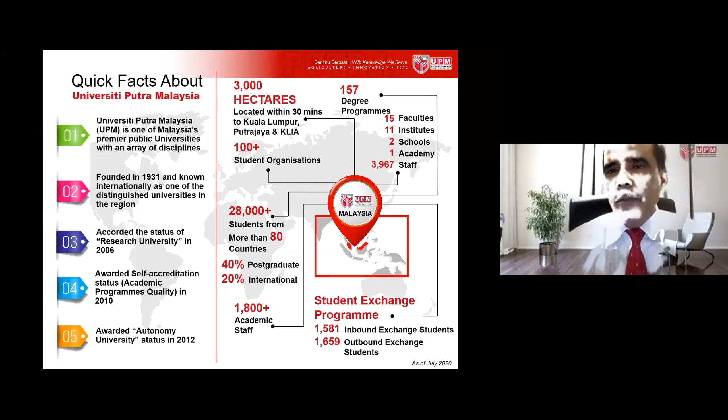UPM is one of the research-based universities in Malaysia. We have 5 research-based universities, and we are more focused on agriculture. We have a long history, and we have faculties and postgraduate students from internationals around 80 countries represented.

We also participate in different international standing rankings, and this is a little bit not updated, as in 2021 our ranking changed a little. We have different faculties, 15 faculties, and 11 institutes.

Within those institutes, there is one Institute of Tropical Forestry and Forest Products, and I'm attached with that laboratory. We also have a school, and our institute also comes under the Higher Education Center of Excellence, HICoE. There are a few institutes given by the ministry, and we have different accreditations for different courses.

We have also collaborated with a few universities worldwide, with MOUs and MOAs with different universities, and international students from 80 countries. We also have a summer school and research clusters, and some commercial products, which I'll show here. This includes some translational research, awards, IP, and community engagement projects with Safe Kids, Air Asia, and Farm Fresh.

So let's come to that. He already gave the introduction about me, so no need to go more into that. These are my research students, but most of them have already passed out - I think 2-3 are left now. Most of them completed their PhD and Master's degrees from here.

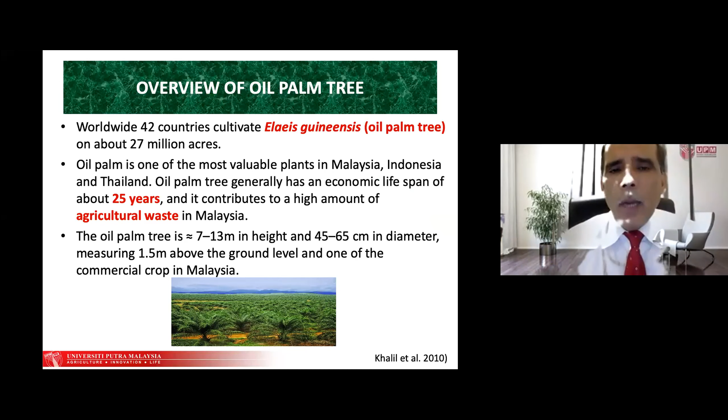I don't need to go more into the oil palm tree itself. If you look at the distribution of oil palm plantations worldwide, there are several countries doing this, and looking at the distribution of oil palm plantations in Malaysia across different states, you can find that out.

When we look into what constitutes the oil palm, there are three things we can use: oil palm frond, empty fruit bunch fiber, and oil palm trunk. Most of the time the empty fruit bunch is more readily available, because the palm oil mill extracts the palm oil and then disposes of it, and it's one of the hazardous materials. So there are many industries now that can clean it up and make fibers, which you can buy and use for different purposes.

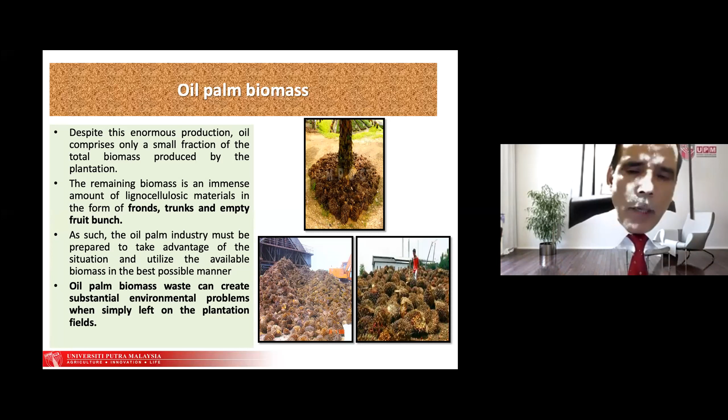If you look at the oil palm situation, there are thousands, even millions of tons coming out, and the remaining biomass is very difficult to handle. This is one problem for the palm oil mill - how they are going to dispose of it. Oil palm biomass can create substantial environmental problems when left on the plantation field.

If you look at the palm oil industry, palm oil is 10% and 90% is biomass. This biomass includes oil palm fibers, oil palm fronds, and oil palm trunk fibers. These are the things that come out as byproducts from this industry.

If you look at oil palm waste, there's mesocarp fiber, palm shells, empty fruit bunch, trunks and fronds. Generation of oil palm waste during processing amounts to millions of tons, like 30 million tons, and this can vary.

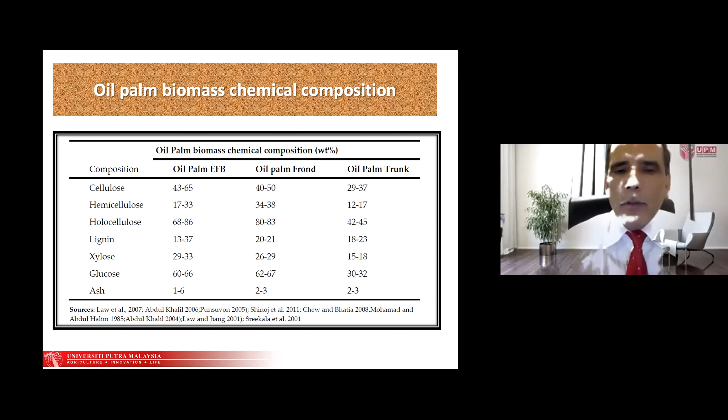When we look into the chemical composition of oil palm biomass, we find a good amount of cellulose, lignin, and other material, which can be suitable for various applications, giving whatever form of strength we want. This can vary from place to place, and the data range reflects that - some people have reported 40 and some reported 50, so we take the range. With that range, oil palm has a good amount of cellulose, which gives strength for construction or other purposes. It also has good lignin content and tough fiber.

Nowadays everybody is talking about nanofillers, and there's been research on oil palm for this. A few researchers, including ourselves previously, have worked on this - this is very old data from when I first did this work. Very few people were working on oil palm nanocellulose when we started in 2014. At that time we produced microcrystalline cellulose and did total chlorine-free pulping using the acid hydrolysis method, then used hydrogen peroxide bleaching sequence for that.

We did FTIR analysis and found that acid hydrolysis does not affect the chemical structure of the cellulosic fragment. We also did morphological analysis, investigating our MCC using scanning electron microscopy, and we also did AFM analysis. All of this is published work that you can find in the literature.

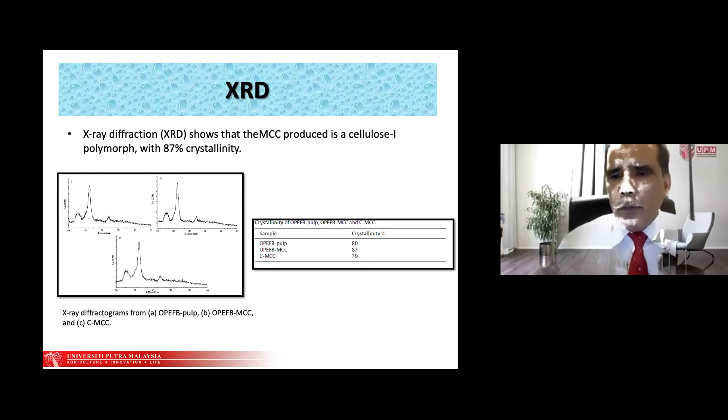And we also done the XRD, and we find out that the MCC have a crystallinity of 87%. And then we also done the thermal properties, and we find the degradation temperatures for the MCC and pulping and residual content, and how the peak temperatures we are getting.

In view of the thermal analysis results, we concluded that MCC samples produced from the oil palm pulp has good thermal stability, and it can be suitable for the production of green composites.

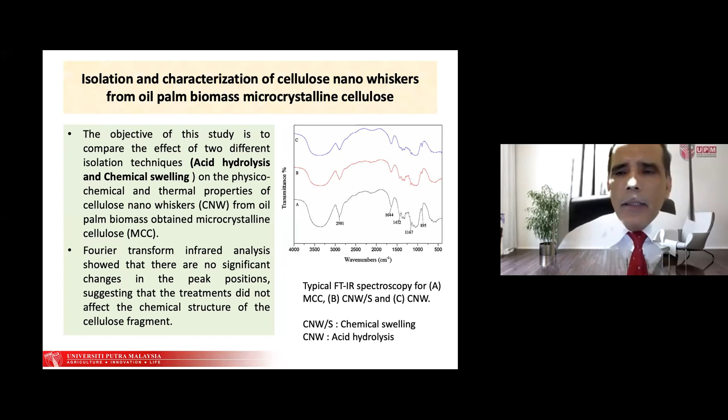We also done the microcrystalline cellulose, and we also done the cellulose nanowhiskers from the MCC, and we analyzed it and compared with the MCC. All these things you can search, it's already published in the Carbohydrate Polymers Journal long ago.

We also analyzed the structural and morphological structure, and we find that the size is within range. We also done the XRD, and we find out the crystallinity of that nanowhiskers is 88%.

We also analyzed the TGA, and we find out that the produced cellulose nanowhiskers exhibited better thermal properties than the MCC, making them suitable as a reinforcing agent in biocomposite preparations.

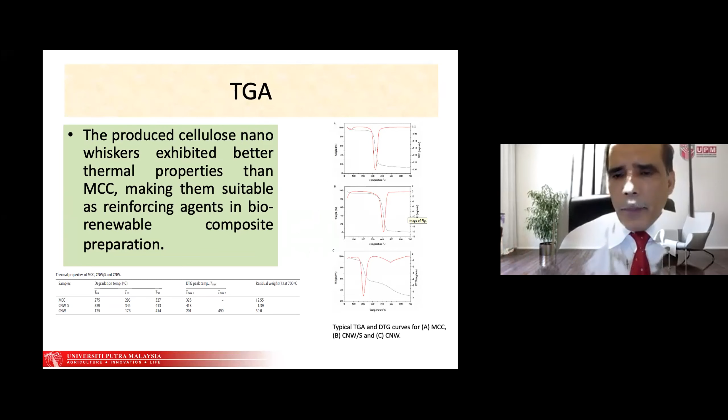We also done another research, we call it the oil palm fire retardant. So we modified the oil palm fillers, made powder from it, and then treated it, and later on made composites from that. So basically that's how we treated it.

First we did the grinding of the oil palm fibers. We done the chemical treatment by bromine water and SnCl2, and cryogenic crushing to make it very fine powder, followed by the high energy ball mill process. The high energy ball mill process proved to be a sophisticated technique for the reduction of macromolecules.

This is a physical method of making the nanomaterials.

We checked the size through the TEM image, and we find out that the lowest size we get is 6 nanometers, but there is a range of sizes after the crushing—it may be 40 nanometers, 60 nanometers. There are different ranges out there.

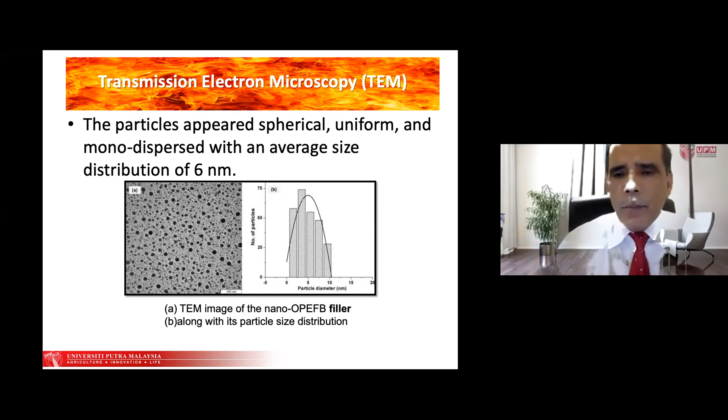So because of that, we plotted the number of particles in that TEM image. We also done the XRD of that nanofiller, and we find out that the decrease in crystallinity indicated that the mechanically operated ball milling induced a significant decrease in particle size from the raw material to the nano oil palm fillers.

We also analyzed the untreated oil palm fiber, brominated, and brominated with tin chloride. From the FTIR spectra analysis, we confirmed that the SB material, which has bromine and tin chloride treatment, contains those elements—SnCl and bromine are absorbed onto the surface of the fibers, while still maintaining the basic structural components of the cellulose, hemicellulose, and lignin. So it did not disturb the structure of the fibers when treating them.

We also looked into the comparisons, on the left side, of before ball mill and after ball mill.

We investigated the EDX, showing the presence of tin, carbon, oxygen, chlorine, and bromine elements, both before and after the ball mill.

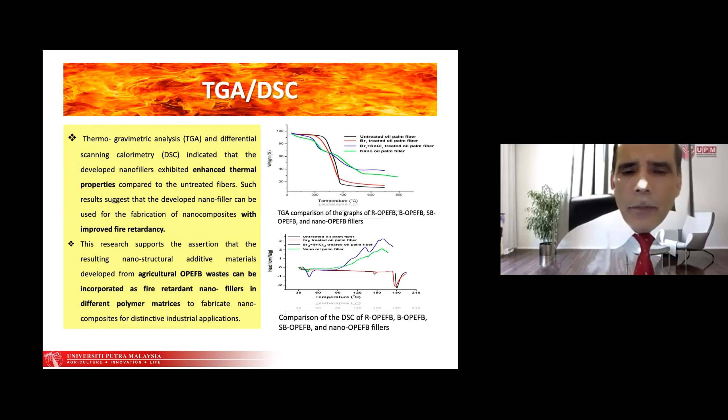We also done the TGA and DSC of these materials, and we find out that the resulting nanofiller can be used for the fabrication of nanocomposites with improved fire retardancy, and this can be incorporated as fire retardant nanofillers in different polymer matrices to fabricate nanocomposites for distinctive industrial applications.

We also earlier done work on oil palm jute fibers, because the oil palm comes from the fruit part and jute is from the bast fiber. So we had a purpose to make a unique composite that can be used for advanced applications.

So we done different layering patterns: the top oil palm on both sides, and the core we put jute fibers, with both outer side layers also put into jute fibers, and we made it into composite forms, and studied its mechanical properties and other properties.

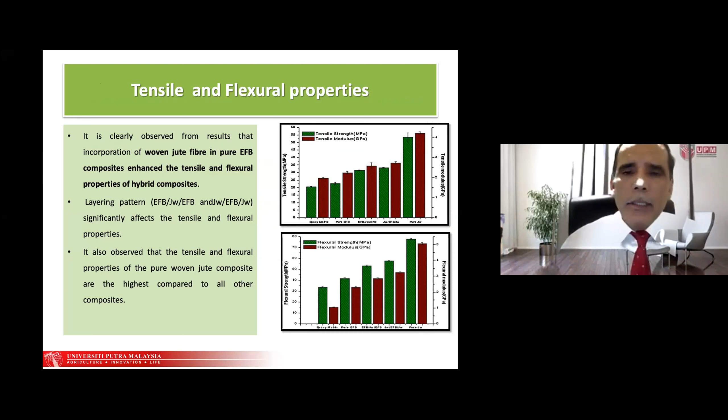We found that the woven fibers in the EFB enhance the tensile and flexural properties of the hybrid composite compared to the pure EFB composites. We also looked into the composite and found that the jute fiber has better interaction bonding with the matrix compared to the EFB alone with epoxy.

We also performed dynamic mechanical analysis of these materials and found that the EFB and jute hybrid composite exhibits the lowest storage modulus, showing that increasing jute fiber loading enhances stress transfer. I want to explain something about this.

DMA is a form of testing where you measure the mechanical properties against temperature. From that you get the storage modulus of the materials, you can get the loss modulus, and you can get the tan delta, which is the damping factor of the material.

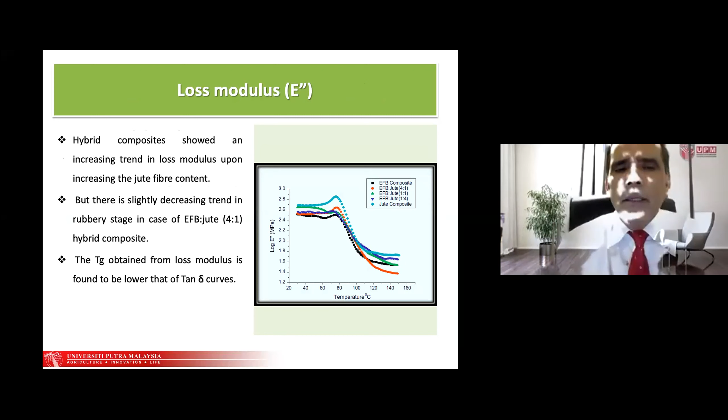We also analyzed the loss modulus and found an increasing trend upon increasing the jute fiber content, because jute fiber has better strength. We found a slight decrease in the rubbery stage, and the Tg obtained from the loss modulus was found to be lower.

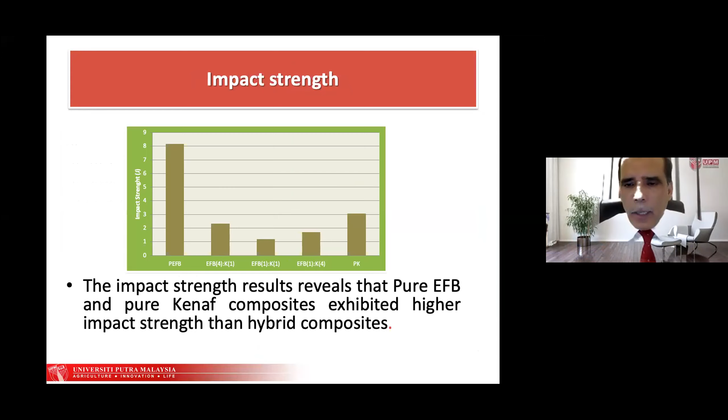There is one research we did on that. In this research, what we did basically was look at the effect of radiation. This is a simple overview. Then we did another research on Kenaf and oil palm, where we looked at the radiation effect.

There was one student working at the Nuclear Malaysia Agency, and she had access to it. So we went through irradiating the samples in gamma cells using different radiation doses.

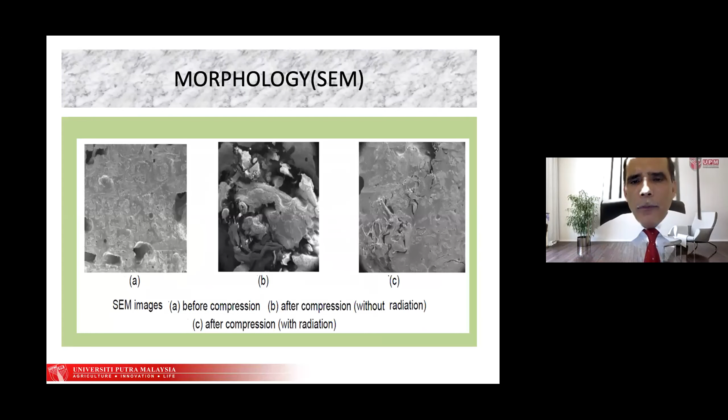We found that the radiation dose improved water absorption, and the interaction between fiber and matrix also improved after irradiating the composite, and compression strength also improved. For example, 50 and 100 doses showed better results compared to non-irradiated and 25.

We are also about to finish a PhD on oil palm and sugar palm, developing an insulation board. Our purpose was to use both waste materials, since sugar palm and oil palm are both waste materials.

We already did the treatment for this. We made different types of insulation board using different fiber ratio compositions, and studied the thermal properties, acoustic properties, and other aspects. We found this to be very suitable material for insulation, and we have already published some work on it.

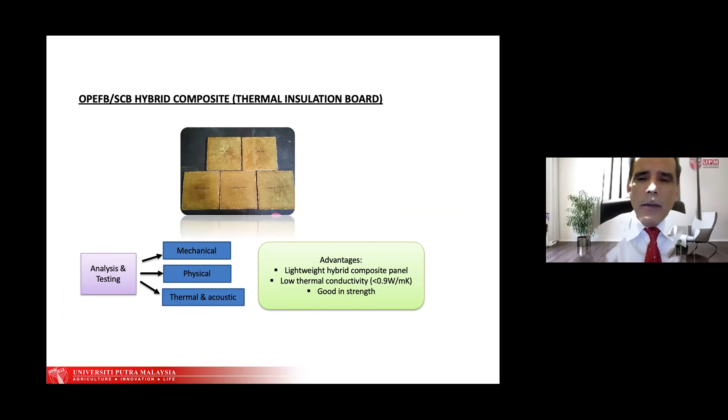You can find this work in construction and building materials journals. We published two papers related to this, and this analysis has largely been the output of this research published in journals.

Looking at the overall scenario, these materials can be used in automotive, aircraft, decoration, furniture, building, and food packaging applications.

I'm just going to briefly cover one recent international project we completed on food packaging. We developed packaging material from oil palm EFB. This project started in 2016 with Malaysia and UK partners, both industrial and academic, and we finished the project in 2019.

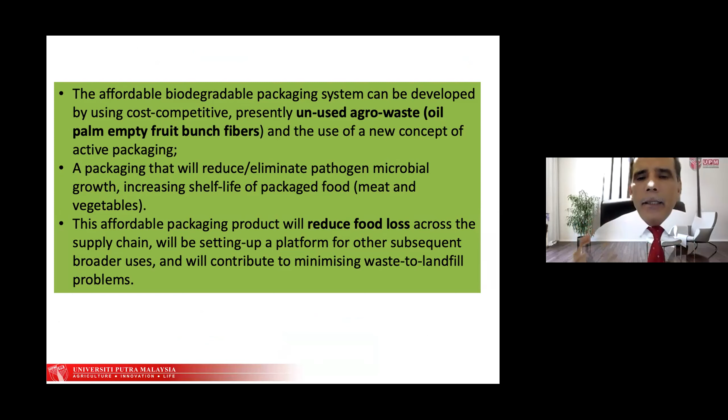So basically in this project, our purpose is to use agro-waste materials and the new concept of active packaging. We have to develop a type of packaging material which can reduce pathogenic microbial growth, increase shelf life of the packaged food, reduce food loss across the supply chain, and contribute to minimizing the waste to landfill problem.

So look at the concept: this is a fiber, then you do the pulping. This is a simple flow for this process. We chose this material because it's cheap and large in quantity, with continuous supply from waste to high value added product, low lignin content, high fiber, and good bonding strength. It can be used as packaging paper bags, fabrication of cartons, food trays, vegetable trays, and it's environmentally friendly, non-toxic, and biodegradable.

This is a pulping plant. You can do the pulp molding by wet type, or you can do the pulp molding by the dry method. So this is the setup of the industry where we did the pulping.

So this is the pulp we developed in our institute, and we took this pulp to the industry and put it into the pulverizer tank. In this pulverizer tank, if you want to add any additives, you can add them at this stage.

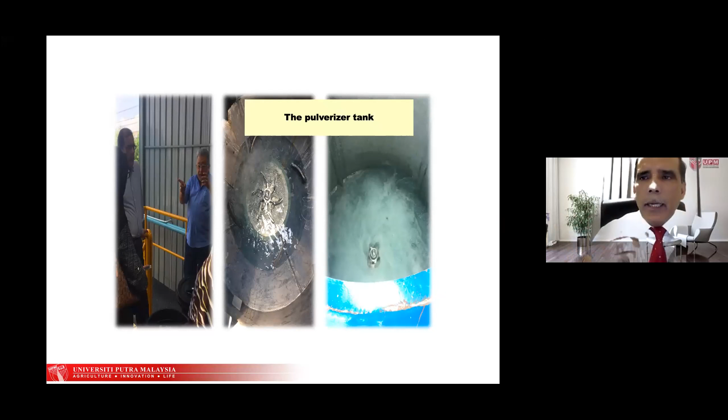After that, putting the pulp here, there are high speed agitations and low speed agitations. Then the pulp slurry was pumped into the holding and mixing tank. After the mixing tank, there is a pulp mold and a control panel.

So you can control everything, you make the settings there, and according to that setting, that type of product is produced based on the mold you feed in. So we produced this lunch box from that, and we looked into it.

There is a positive effect: it's smooth and well formed, and there is a positive charge allowing easy bonding with water and oil repellent agents.

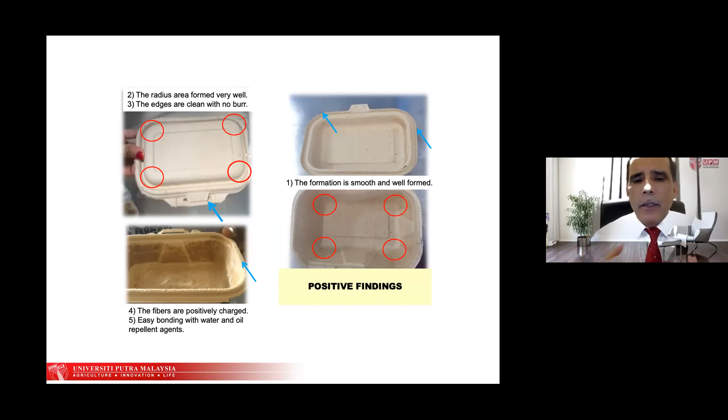And we did the second stage trial over around 3 years. In this trial, we made what we call the plate, because by that time they were already doing that. And parallelly, we were also doing research in the UK.

Initially they also tried to make pulp molding products using oil palm fiber, which we sent from Malaysia to them, but they were unable to produce the right shape.

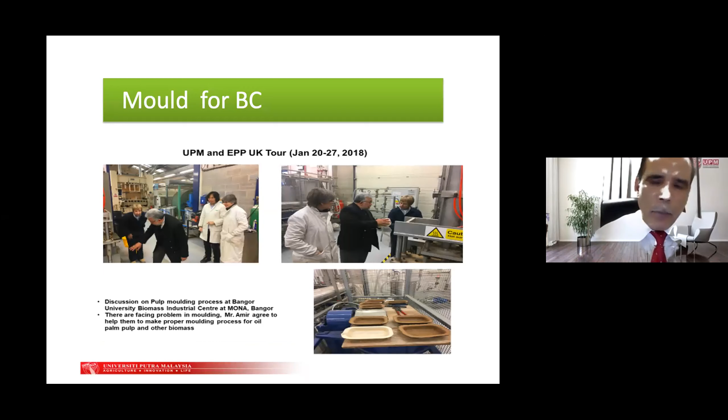So then we visited the UK, myself and Mr. Amir from the pulp molding company. We visited the UK and looked at the problem with them, and then we figured out the problem. We designed a new mold design feature for them.

And then after that, there is a video. If I just play it for a moment.

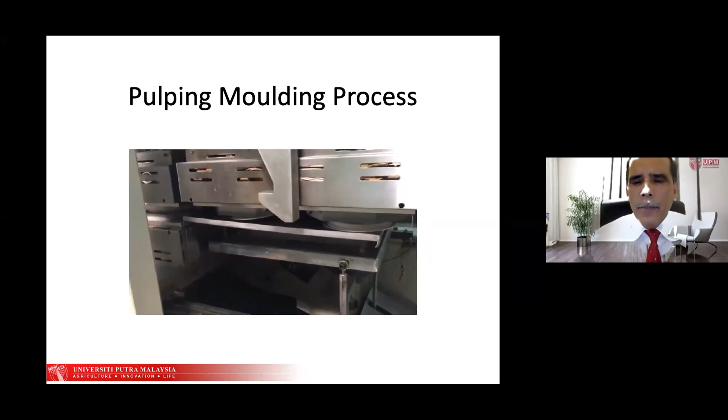So this is basically a pulp molding machine, and it can take that material.

And then we also did a life cycle assessment of the pulp molding process, and we looked into the outcome from this product - how much energy consumption occurs at every step.

And we also tried to pack it in a professional way compared to the plastic that the current hypermarkets are using. And then we also designed it.

We did the lidding of this pulp molded tray, and we used a biofilm and a bioadhesive, so it's a 100% biodegradable and compostable tray.

So this is the film we use for tray sealing, by a UK company.

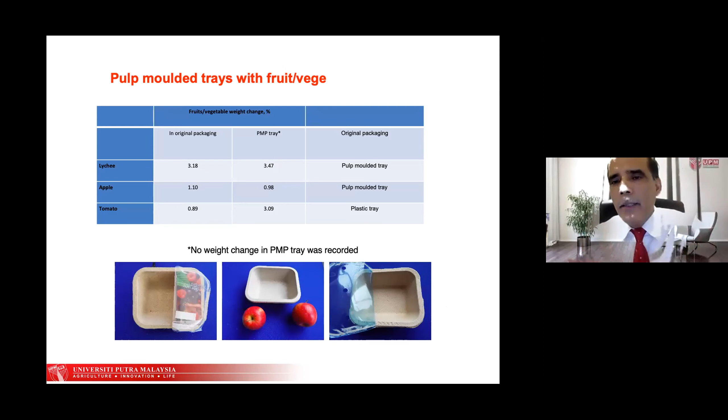And then we also put different types of fruits and other things and looked into it in a professional way. We studied the original packing and what weight losses happen in it.

We also studied meat, looking into the coated tray with chicken to check for contamination and other factors.

We used the pad to find solutions, and no packing failure was identified over the testing method.

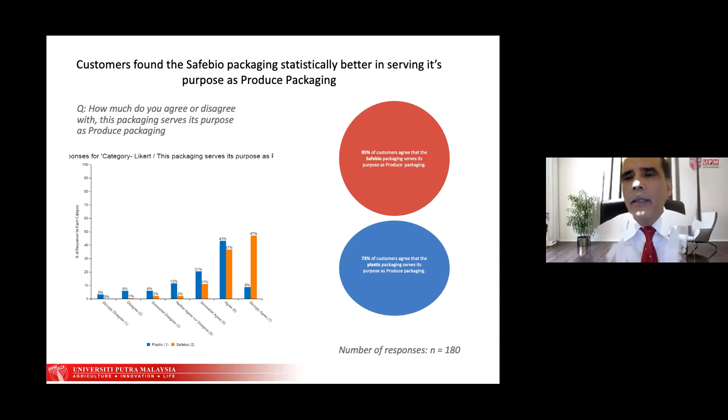Can I ask you to wrap up soon? Yes, about to wrap, don't worry. Just a couple more minutes, then we'll finish so we can answer questions, because I'm sure we'll have a lot of questions. 2-3 minutes, Midani. Don't worry, it's a bit long but I'm going to wrap it up.

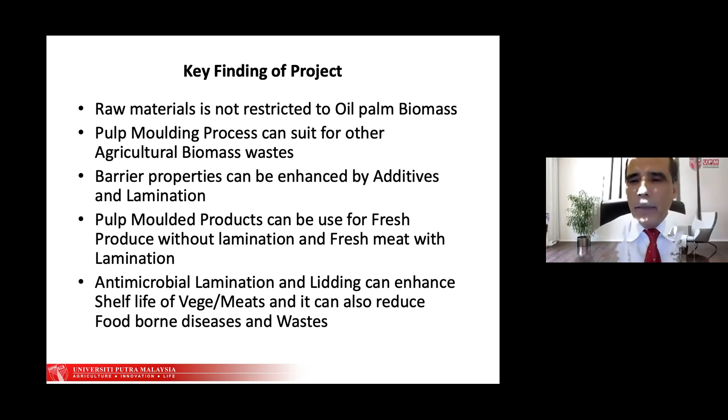So the key finding is that oil palm is a suitable material for packaging, and it can have enhanced additives. Pulp molding can be used for fresh produce without lamination, fresh meats, and antimicrobial laminations. We also did injection molding using oil palm with biofiller, making sheets and analyzing their properties, strength, and other characteristics.

We did trial production of packaging trays using vacuum forming machines, including industrial vacuum forming machines. We formed the vacuum-formed tray using oil palm and biopolymers. We also did hot pressing for the production of the tray.

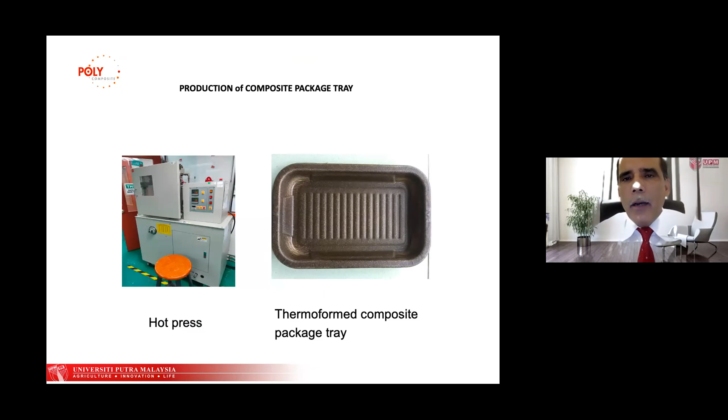We also made a meat tray, since the meat is going to touch the tray directly. So we tested strips here, and you can see the back and everything is very smooth.

Looking at other small applications, there's also automotive application. You can take oil palm waste and make it into components - this is old information from Proton. I don't know if they are currently using it or not.

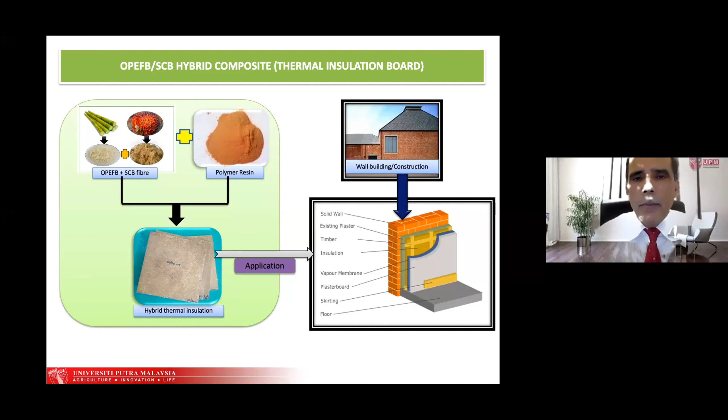Similarly, in our research, we have a plan to develop wall construction using hybrid materials developed from oil palm. You can also use oil palm in furniture, and in aircraft applications for several types of aircraft. Others have done this and compared it with bamboo, banana, kenaf, and other materials.

We concluded from this that oil palm biomass has high concentration and is one of the most viable alternative sources of reinforcement in composite materials. It can be reinforced with thermoset or thermoplastic - any material can be used with oil palm waste. The oil palm fiber - trunk fiber, frond fibers, and powder fibers - show effective and considerable improvement in mechanical and thermal properties. Oil palm fiber-based composites can be effectively utilized in automotive, aircraft, and construction materials.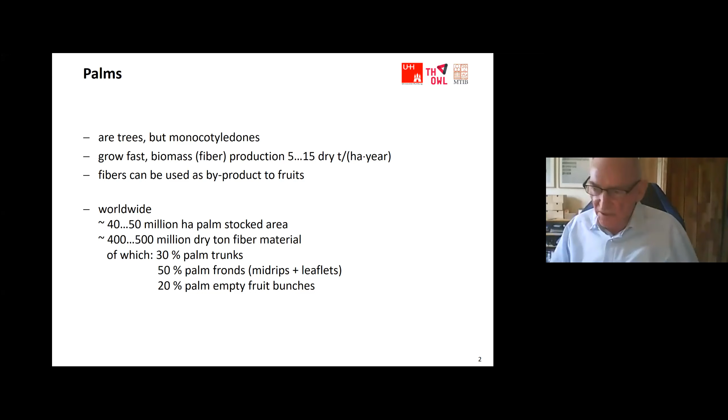The fibers can be used as a byproduct of fruits. Palms are normally grown for fruit production, not for fiber production. Worldwide, we see about close to 50 million hectares stocked with palms, different types of palms, several hundred species, producing between 400 and 500 million dry tons of fiber material. About 30% of that fiber material can be found in trunks.

Let's look at the 3 most important palms in terms of trunk material: oil palms, coconut palms, and date palms. For oil palms, the estimated area is 25 million hectares, with a short rotation period of up to 30 years. The estimated trunk volume per year available from these 25 million hectares is about 150 million cubic meters per year worldwide.

At least two-thirds, even more, are in Asia, Southeast Asia. Coconut palms live longer, with a rotation period of up to 80 years, and the estimated volume is smaller because the estimated area is also smaller. Date palms are grown on roughly 2.5 million hectares, and their lifetime is even longer, so the estimated trunk volume available per year is even less.

Considering all palms, we have at least more than 200 million cubic meters of palm trunk material available per year, compared to about 2 billion cubic meters of commercial timber worldwide—so about 10% of the timber volume. This shows the potential to supplement or even substitute tropical timber species, so let's concentrate on Southeast Asia, looking at Indonesia for example.

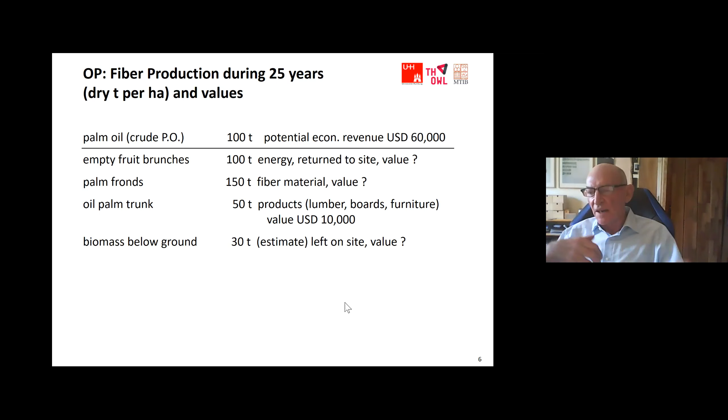The same variation is seen with coconut palm, but it's not the same with date palm. The key factor is mainly the age of the palm. The date palm is quite old, and the palm stays alive all the time in all parts of the trunk, so it grows thicker cell walls over time. If the palm is older, the cell walls of the parenchyma cells are thicker, so the density is more uniform and higher.

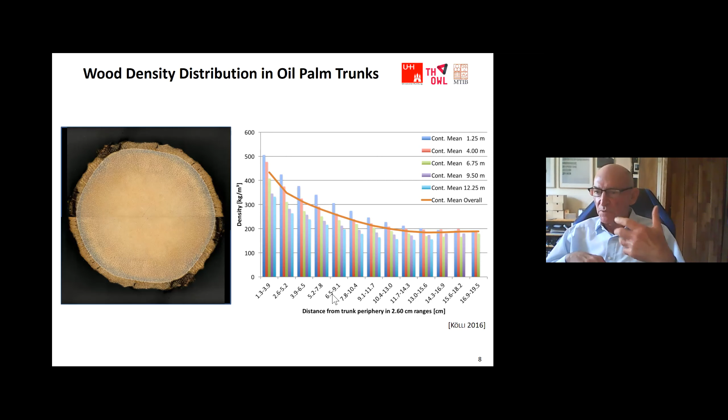This is a chance, but also a challenge. We can even use palm wood instead of softwood species like pine and spruce, if we do it well. This is the challenge for us as researchers, and for the industry, to do it well.

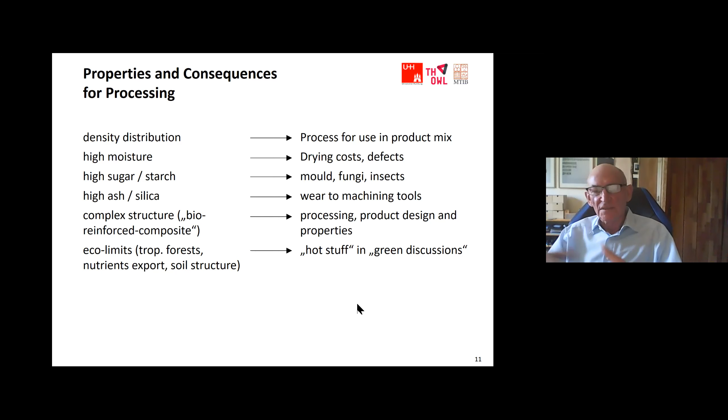The next slide gives us how we can manage this. The density variation can be partly managed by appropriate sawing pattern and by good grading and sorting. The sugar and starch problem by temporary treatment after sawing, for example with acetic acid before drying. The ash and silica with new tool materials. And the high, low and medium density material we can use in different parts of a product, in a composite type product, or we can grade the material and put it into different products.

So the next slides give us some ideas about the products - first the possibilities we can produce. If we look, for example, oil palm is a very universal material if we do it right, with the grading, with the proper machining and so on.

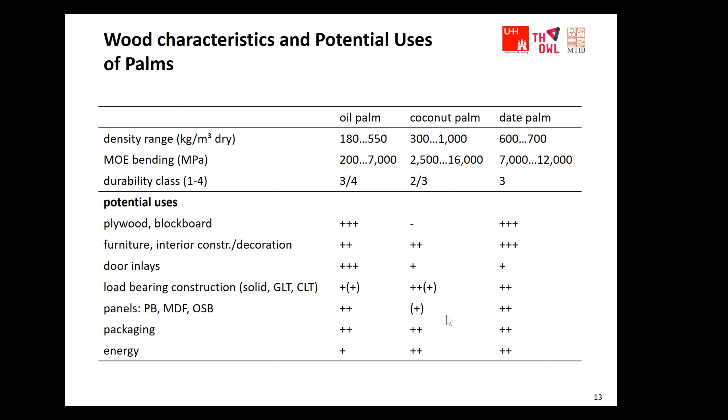The coconut palm is quite heavy, the density is high, so for blockboard and for plywood it is hard to process. And the date palm is also very good for almost all different types of timber-based products. The next slide gives us the pictures.

An example for lightweight blockboard material - this is palm wood core material with a density of something around 0.2, veneer overlaid.

The next slide gives us a flush door panel, also with a core from light or medium weight blockboard - whatever sound insulation we need, whatever strength we need, we can use lightweight or medium weight or even heavyweight material.

The next slide shows us a 3-layer solid wood panel, CLT, which was produced in industrial style. The next slide gives us a beam, a laminated beam, glulam, produced from oil palm.

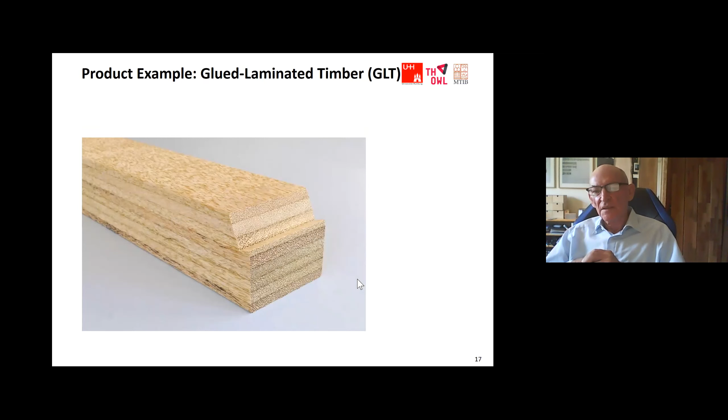And the next slide brings us to Bali. This is a newly built conference center at Hyatt Regency in Bali, exclusively built from coconut wood. Very nice, and this is a recommendation to have a Biopalma conference at Hyatt Regency in Bali one time, which is a very nice location, making good feelings about palms, because the beach with coconut palms is only 50 meters away from this picture.

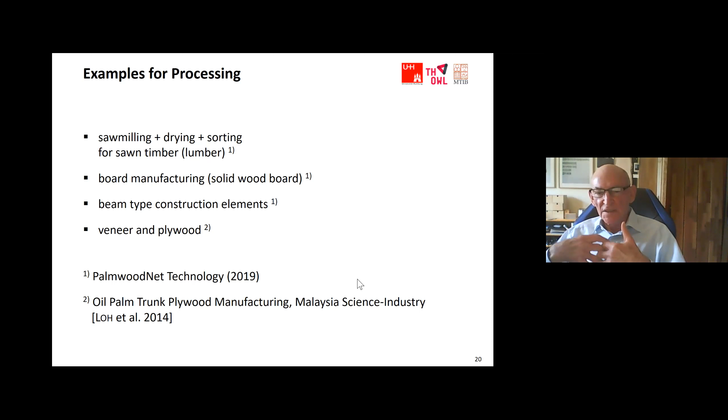So the next slide, examples for the processing: sawmilling and drying and sorting for sawn timber, then board manufacturing, beam type, construction elements, and veneer plywood. So these are the main processes.

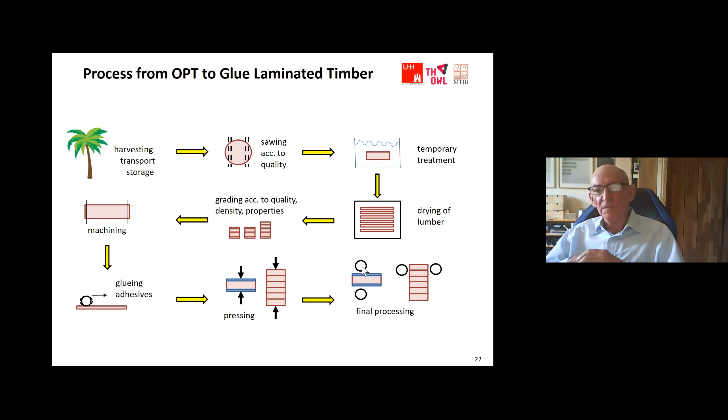Okay, next. So if we look to the results, we have achieved very good results for all the main process steps: material management, sawing, drying, planing, visual and strength grading, residues management including energy or fertilizer, and complete mill design, mill setup and investment production costs, with really high recovery rates for the products.

So the next is plywood, and I would like to give the floor to our colleague, Dr. Loh from Malaysia. Dr. Loh.

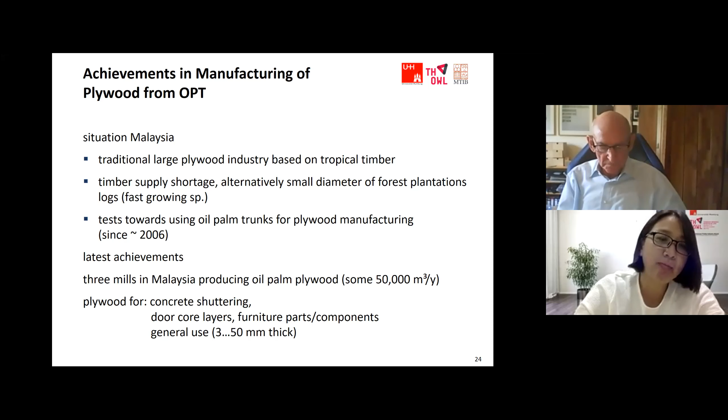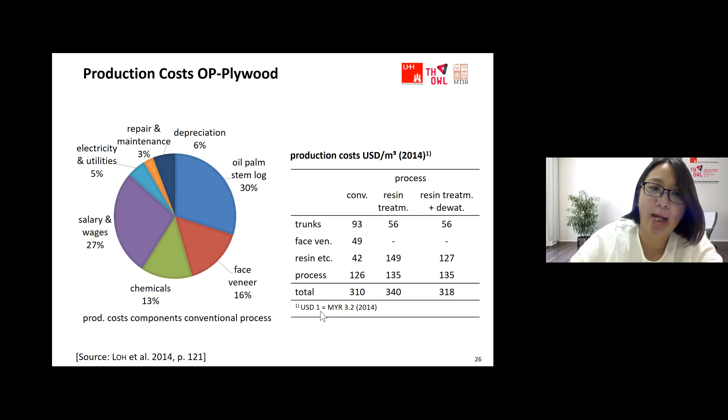Okay, next. So look at the slide. We also have calculated the production cost for the normal OPT plywood and also plywood with some modification process, back to the year 2014. As shown in the graph, you can see the major cost is from the raw material and the wages, about 30% and 27%. The production cost, shown in the table, for normal OPT plywood is about $310 per cubic meter. With resin treatment, the cost will be higher due to chemical cost, roughly increasing about 10% of the production cost, but the cost can be reduced when we do some modification on the dewatering process, and we can also make some savings on the drying process. Okay, on the next slide.

I would like to summarize that the oil palm trunk can be used to produce good quality plywood with suitable modification and enhancement to the existing technology or machinery in the mill. The OPT logs can be stored longer with a simple treatment.

The peeler needs to be modified to peel the soft inner part. We can now peel down to veneer up to 6 millimeters or maybe more, but not very thin as it is now.

The crucial part is the drying process. A lot of work has been done by researchers in Malaysia to shorten the drying time, increase the quality of the veneer, and increase mill capacity. The rough veneer surface is also a main issue during gluing because it consumes more glue, but less glue is consumed if the veneer undergoes the platen press drying process due to densification.

The other problems are veneer handling and uneven thickness of the plywood due to density variation, as mentioned before.

So hopefully with all this modification on the processing and some enhancement, I believe the OPT plywood can compete with other plywood from hardwood and softwood in terms of quality, and also comes from sustainable resources. So not only plywood, we at MTIB, Malaysia Timber Industry Board, are also working closely with Professor Arno and Professor Katja from Germany on oil palm timber.

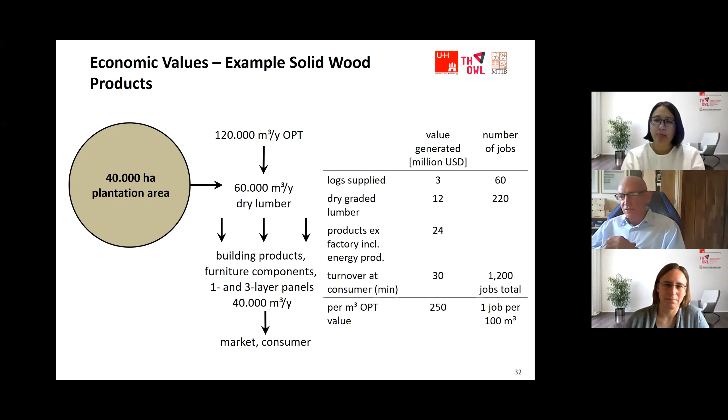In Germany, for example, we have the same ratio, 1 job per 100 cubic meters of harvested roundwood. So with that, I invite you to the presentations in September, but Dr. Midani will do it at the end of the workshop today. I thank you for your interest. If you have questions, you can put them now or later using these email addresses. Thank you.

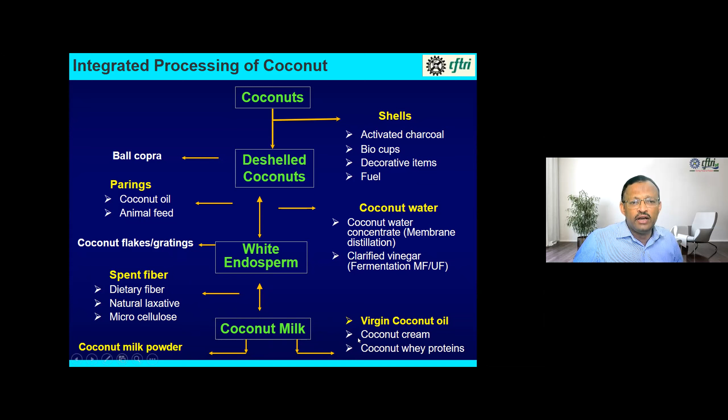When you take the coconut, we shell it and get a ball copra, and we can get the shell. The shell can be used in many ways. Then we take the white endosperm, that white part of the coconut, which can be used for flakes and grating. Whatever coconut water comes out, whether mature coconut water or tender coconut water, has a lot of applications. From the white endosperm we can extract the milk, and after extracting the milk we can extract virgin coconut oil from it, the coconut cream can be packed, and we can even extract coconut whey proteins.

The different approaches here are meant to introduce and adapt new technologies that are developing in the food sector, the purpose being to adopt new technologies in the coconut sector so that the rural economy becomes vibrant and viable, and to develop technologies for byproducts in coconut processing to increase consumption, because consumption of coconut is decreasing. So we want to make different products so that consumption of coconut increases, and whatever byproducts are being wasted can be used in some way as value-added products.

So what are the different technologies? These are mainly technologies developed at the CFTRI, which is part of the CSIR laboratories network, and here we have made different technologies. I'll just brief about this.

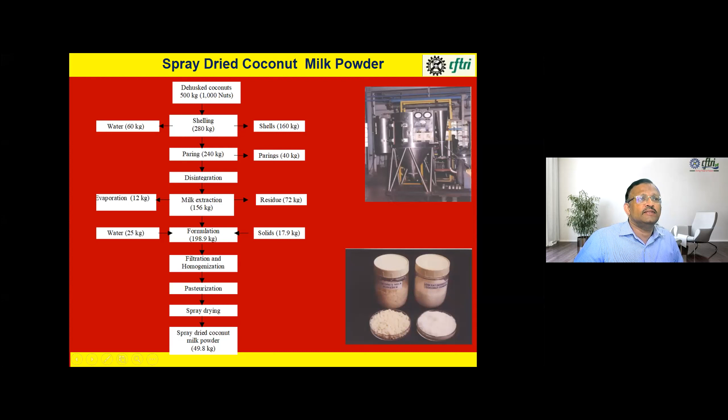Coconut milk is a stable emulsion. It is very difficult to break the oil and protein. Many people who started working on this were not able to break the emulsion and separate the milk. We achieved this, and around 90-99% of the milk fat was separated, allowing us to obtain the virgin coconut oil.

The applications are in the pharmaceutical industry, cosmetic applications, body care, seasoning, cooking oil, and direct consumption. It has a mild sweet aroma, but very high export potential and very high medicinal value.

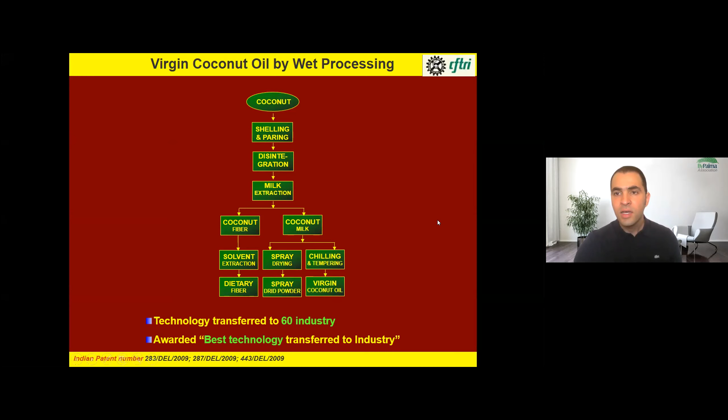Seems that we lost the connection. I think Dr. Navin has a connection problem. He seems to be online, but maybe it's the network. Just give one or two minutes because the screen is moving. I think it is stuck. Dr. Rastogi, are you still connected? If there's a problem with the internet connection, try stopping your camera. I think we can see the screen working, but there's a problem with the audio. I think he was disconnected. Sorry about this technical problem. Let's see if we can get him back. We're sorry about this, we'll wait one more minute, and if he's still unable to join, perhaps we can proceed with our next scheduled session.

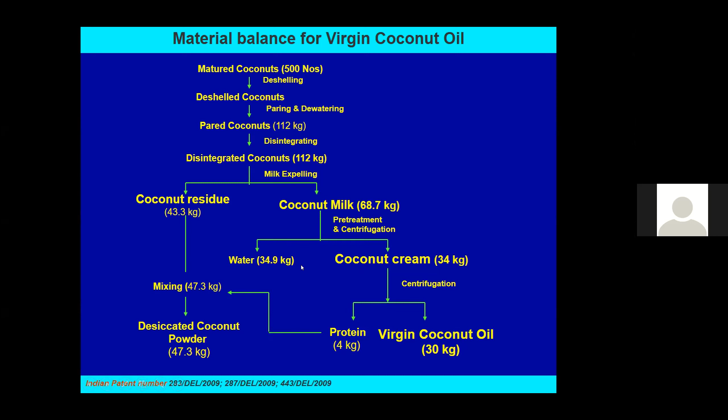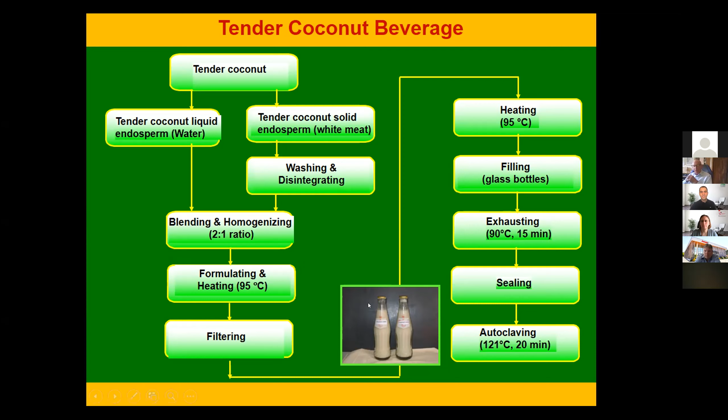Another technology is the tender coconut beverage, made from tender coconut milk combined with coconut water. The process involves washing, grading, blending, formulating, heating, filtering, filling, and then heating again to 95 degrees for exhausting, like autoclaving. This results in a bottled tender coconut beverage made mainly from coconut, with a shelf life of around 6 months. This is a new type of product based on tender coconuts.

Now for the nutritional facts and microbial analysis, like we have done in this case, the product was having mesophilic and thermophilic bacteria, but their spores were absent, and the fermentation test was negative. The product was shelf-stable for around 6 months. We have also done sensory analysis of the product.

The attributes studied were whiteness, consistency, coconut-like flavor, sweetness and overall quality. The product was well received and acceptable to customers, as we used tender coconut and tender coconut water together to make the beverage. The product was acceptable from around 3 to 6 months, stored at ambient conditions, and was found to be stable.

Another point is that mature coconut water is generally wasted by the industries. So what we did was concentrate mature coconut water to 60-degree Brix using filtration, centrifugation and evaporators, and then added it to a pectin and xanthan solution to make a beverage. Whatever coconut fibers were there, we spread them in the coconut product, just to give a coconut taste and to utilize what would otherwise be wasted. It gave a very good shelf life and the taste of the coconut fibers also. Most of these products are patented as Indian patents.

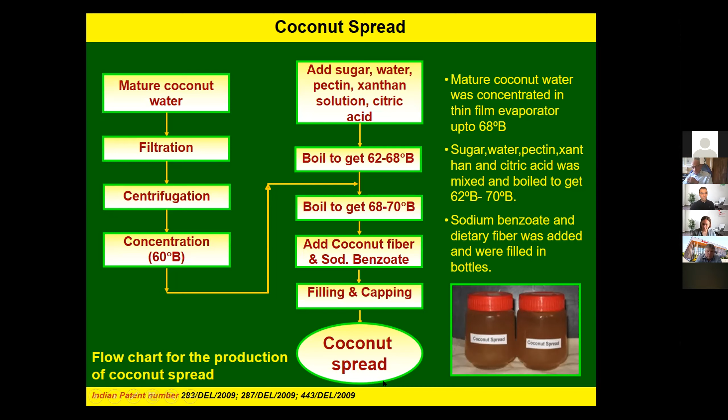The membrane processing of coconut whey protein is another area we worked on, since it is a very good vegetable source of protein, and there are very few vegetable protein sources. When we extract coconut milk, we get a lot of vegetable protein, because we need to separate the protein from the fat to get the oil. Whatever protein is separated also finds a good market.

We did this using ultrafiltration, and the retentate had 98% protein, which was spray dried and can be used as a spray-dried protein powder in different formulations, since it is white in color and a very high value protein.

Another experiment was on tender coconut water concentrate. Most of the time, using reverse osmosis, we can concentrate up to 20-degree Brix. In the new process, such as forward osmosis or osmotic membrane distillation, we circulate the coconut water on one side, and on the other side a concentrated salt solution circulates. Water moves from the coconut water to the salt solution, so the coconut water gets concentrated and the salt solution gets diluted. Here, the coconut water can be concentrated up to 55-degree Brix.

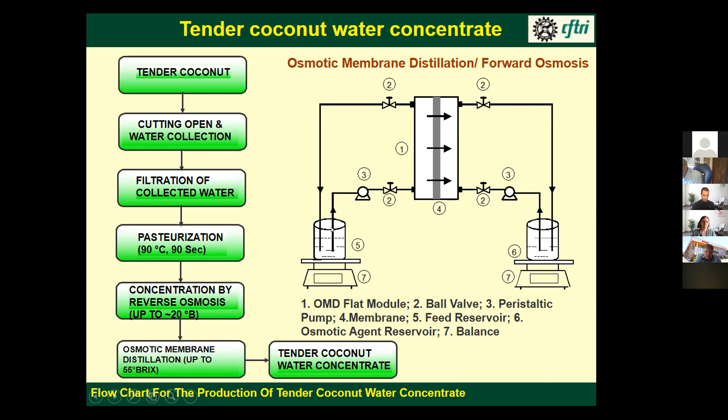Once concentrated to 60-degree Brix, it can be kept as is, or a little sugar can be added, and it can be reconstituted whenever desired. Because the volume was reduced so much, it can be transported anywhere.

This is the process of osmotic membrane distillation and forward osmosis. In the same way, if you circulate this, water will go from the coconut water to the concentrated salt solution, and the coconut water will get concentrated. Once concentrated, we get highly concentrated coconut water around 60-degree Brix, which we can dilute and use whenever we want.

So this is just about how it works. This is the water flux going like that. If this is the concentrated solution, water will go here, and the coconut water will get concentrated, while water goes to the draw solution where it gets diluted.

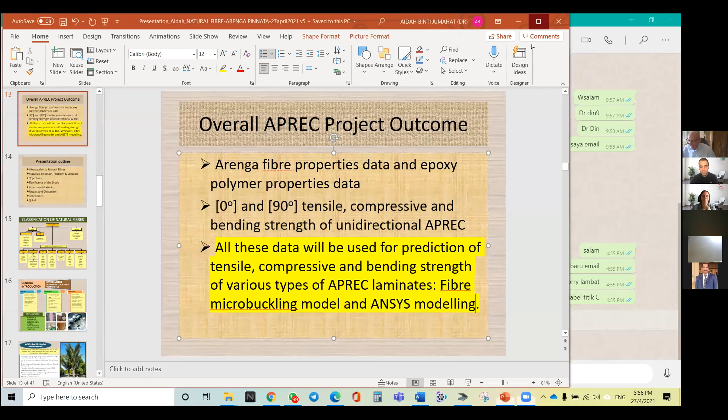So the floor is yours. Okay, thank you, Dr. Midani, for the introduction. Assalamualaikum and very good afternoon, all speakers, all professors, doctors, researchers, and all participants for today. My name is Aidah Jumahat. I am the Associate Professor of the Faculty of Mechanical Engineering, Universiti Teknologi MARA. At the moment, I'm attached to the Office of Deputy Vice Chancellor, Research and Innovation as the Deputy Director of the Industrial Technology Research Niche Area.

Okay, so my presentation today is related to Arenga Pinnata fiber reinforced polymer composite, using epoxy. Here I'm concentrating on mechanical properties. I will share preliminary results on the tensile and flexural properties, and also what will be the effect of Arenga Pinnata if we treat with silane, and also the effect of nanosilica if we put it into the Arenga Pinnata fiber reinforced polymer composite, denoted by APREC.

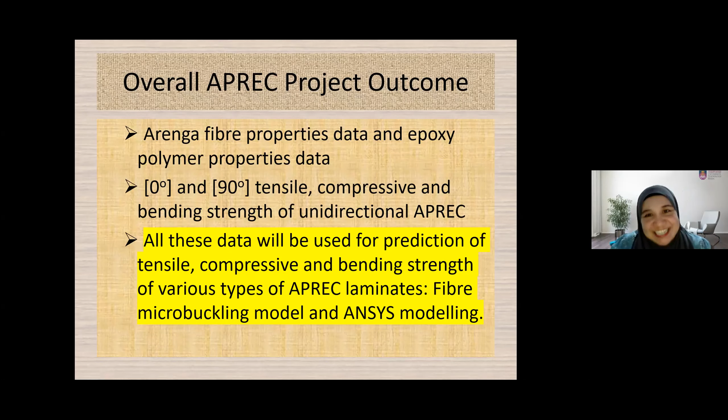So the presentation outline, in general, covers an introduction to natural fibers, matrix selection, problem, solution, objective, significance, experiment, results, discussion, and conclusion.

So basically about the classification of natural fiber. Most of these fibers, like oil palm and coconut palm, have been discussed by the previous presenter, and I'm concentrating on Arenga pinnata fiber. Actually, this fiber is not inside the trunk, it is around the trunk. So compared to coir, oil palm, and so on, this Arenga fiber, we obtain the fiber outside the trunk, around the trunk.

So in general, why is natural fiber composite being used nowadays? Because it is used to replace synthetic fibers, especially carbon and glass, due to environmental concerns, financial reasons, and so on. The advantages of this natural fiber include good specific strength and specific stiffness, when we compare the stiffness and strength to its density, it is very good.

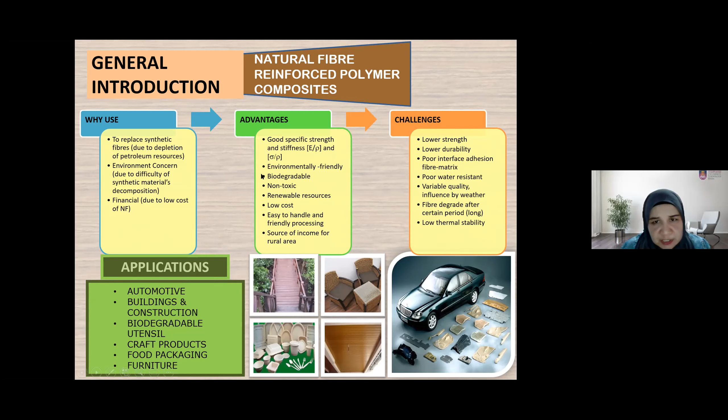So basically, this is the plant - this is the Arenga plant. It can be up to 20 meters tall, with a straight trunk that can be 32 centimeters in diameter. It's one of the plants that produces black colored fiber all around its trunk. So from here we get the Arenga Pinnata fiber.

It was planted by the British East India Company in Penang, in the year 1800, and here is the usage for this type of plant.

It is not only that we can extract the fiber - the palm also can be used. The palm sap can be used as palm nira, fresh juice. The trunk can be used for starch, for biopolymer. The fruit is used as dessert - this is what we call buah kabung - and the leaf can be used as well.

So in this research, we are concentrating on the fiber that we call the Arenga fiber or ijuk. The best property of this kind of material when compared to other kinds of natural fiber is that this fiber is well known as a seawater resistant fiber.

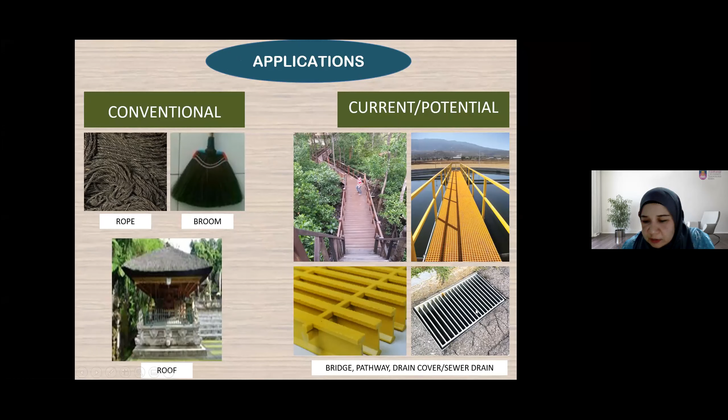And the current potential will expand the usage for bridges, pathways, drain covers, sewer drain covers, and also any types of seawater applications, or we can use it for seawater structures.

For material selection, we use epoxy resin. Everybody knows that epoxy resin has brittle properties due to very high cross-linking. Therefore, we modify the epoxy with nanosilica in order to increase the stiffness, the strength, and the toughness. And also, we use the Arenga Pinnata fiber.

In order to improve the Arenga Pinnata fiber, we treat it using silane. We also align it in unidirectional fashion because we would like to know the basic properties of this kind of fiber in order for us to predict the properties of the laminate. If we prepare a structure based on layup or laminate, we have to predict what will be the properties of this laminate.

So therefore we have to have very basic data on the tensile strength, on the transverse strength, and also on the shear strength. These three properties are very basic in order for us to do the strength prediction.

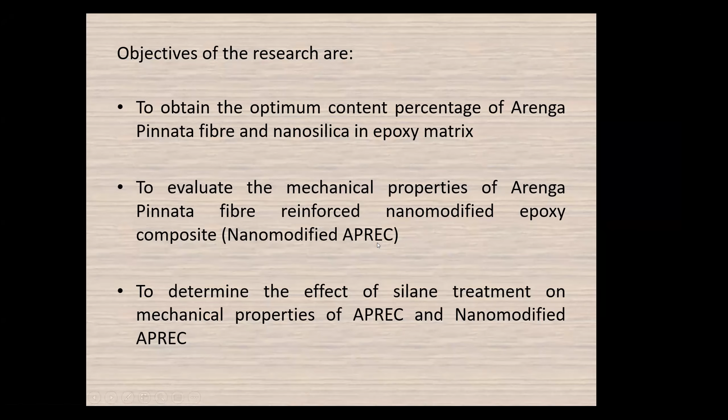So the objective of today's presentation - I would like to share what will be the effect of Arenga fiber content and also nanosilica in epoxy matrix, in order for us to prepare the composite, and also what will be the mechanical properties. Here we will concentrate on tensile and flexural properties, and also what will be the effect of silane treatment on the fiber, on the tensile strength or flexural strength of the composite.

So the significance of the study - we use natural fiber, and we try to improve the matrix by adding nanosilica. We widen the application of Arenga Pinnata from traditional use to making structures, and these structures can also be used for seawater applications. Other than that, we are observing the effect of silica in this study.

For the experimental work, the Arenga Pinnata material was obtained from Kuala Pilah, Malaysia, from Negeri Sembilan. The epoxy resin used is Miracast 1517, and nanosilica is from Nanopox F400. The maximum nanosilica content in the epoxy is about 25%.

It's about 40%, but if we dilute into the epoxy, it's about 25%. We use silane solution for the surface treatment of the Arenga Pinnata.

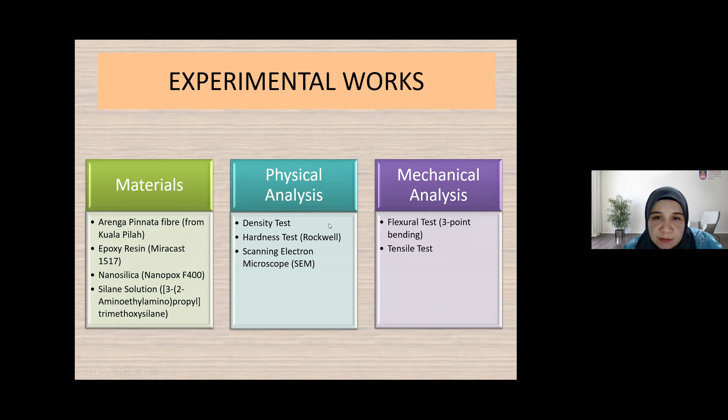We did density tests, hardness tests, and also observed under SEM the fracture surface and microstructure of the fiber. We also did flexural and tensile tests. Actually we did a few other tests, but here we are just concentrating on these two types of testing.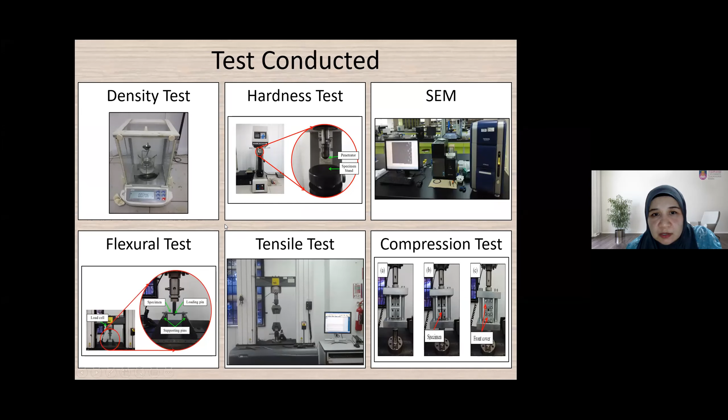The study was conducted on various types of testing, but for today we just concentrate on a few example results. We are concentrating on three different things: effect of fiber volume fraction on the mechanical properties; effect of nanosilica on the mechanical properties, both for the polymer itself and for the unidirectional Arenga Pinnata composite; and effect of the surface treatment of the Arenga Pinnata on the mechanical properties.

So this is the density result. As we can see, the density of the pure polymer, the value at the right hand side, is about 1.14 gram per centimeter cube.

If we put nanosilica, from 5 to 25 weight%, the density slightly increases because the density of the nanosilica is higher than the polymer. So the density increases a little bit, from 1.1 up to 1.26 gram per centimeter cube.

And if we put Arenga Pinnata fiber in the polymer, at 10, 15, 20, and 25 volume%, we can see the density of the composite, APREC, Arenga Pinnata Reinforced Epoxy Composite, is lower than the epoxy with nanoparticles. With 10 volume% Arenga Pinnata, the density is about 1.13, and if we increase to 25%, it's about also 1.13. This is because Arenga Pinnata fiber is very light.

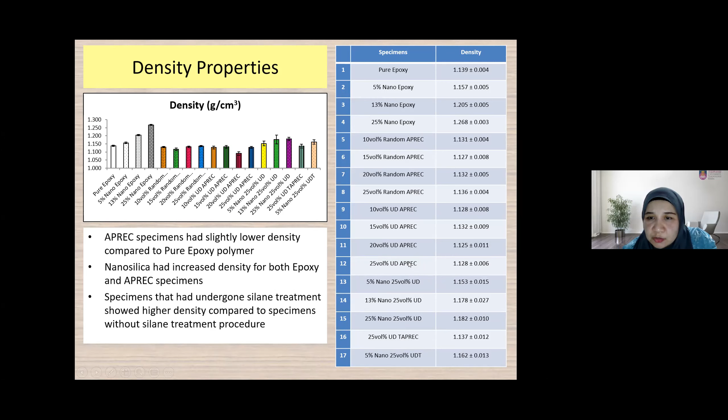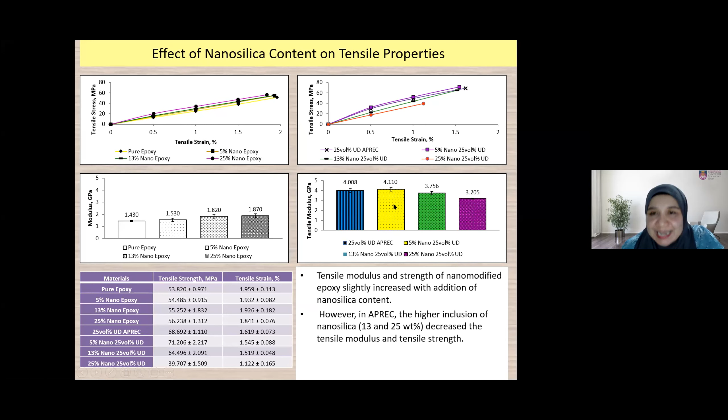Okay, so if we increase the nanosilica content, we can see that the tensile modulus becomes lower. This is due to wetting problem in the resin system. So the best formulation that we can have for this kind of composite is about 5% nanosilica in 25 volume percent unidirectional Arenga pinnata fiber.

Okay, so other than that, the effect of surface treatment: for the surface treatment, we can see a slight increase. If we treat the surface of the Arenga pinnata fiber using silane, actually it will improve the properties of the composite.

Okay, and this is for future experimental work. Other than the mechanical test, moisture absorption test, we will do modeling and simulation as well. Okay, so with that, thank you very much.

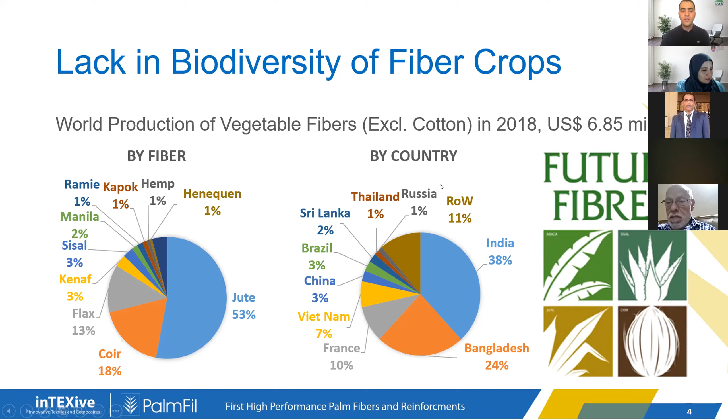So we asked ourselves, are there other sources of fibers, or other sources from which we can obtain vegetable fibers?

And the first thing that came to our mind was the date palm byproducts, because date palm is one of the major elements of flora in the Middle East and North Africa. And we know well that it is a rich source of cellulose fibers. As most of you know, there are more than 140 million date palms around the world, concentrated in the Middle East and North Africa.

And those 140 million date palms generate more than 4.8 million tons of byproducts from pruning, whether it's in the form of fruit stalks, frond stalks, leaflets, or the coir that surrounds the trunk, or even the trunk itself at the end of the palm's life.

And those byproducts in the past were actually used in every aspect of living. They were used in fencing, roofing, making furniture, making crates, making mats, ropes, literally every aspect of living. And there were entire villages who were specialized in making those crafts. But unfortunately, with the widespread use of plastic and other synthetic materials, they just took over those traditional crafts, and the entire economies that were based on making those products just collapsed.

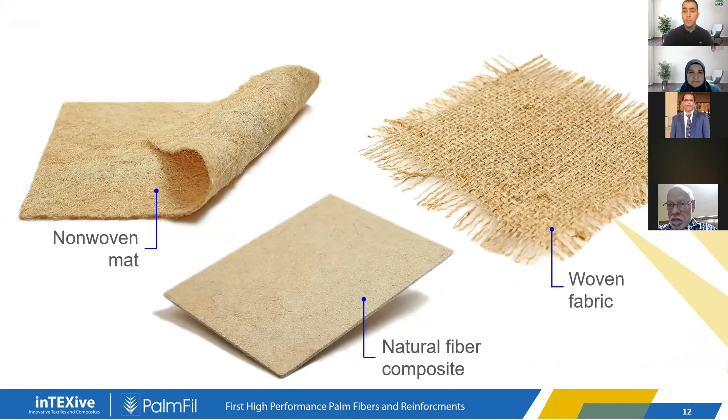And actually, PalmFil fiber has a set of unique features and benefits. It's not only sustainable, but it's also 100% biodegradable. It doesn't compete with food production, it doesn't cause deforestation, and it has a very low carbon dioxide footprint. Actually, a single date palm has the ability to absorb more than 200 kilograms of carbon dioxide every year.

It's also abundant, as I mentioned, it's already available in countries with very high concentrations of date palms, such as Saudi Arabia, the Emirates, Iraq, Iran, Egypt, Algeria, and many other countries in the region. And also it's economical in manufacturing. After all, the value or the price of the byproducts are equal to zero inside the field, and it doesn't require any extra investment in land, in water, in fertilizer, or anything else.

And also the fiber is a high performance fiber. It has specific tensile properties, 5 times higher than structural steel. It has very good acoustical and thermal insulation properties, even higher than carbon fiber and glass fiber. And it's also lightweight and safe. It's only 50% of the weight of glass fiber, and it doesn't require any special personal protective equipment when we're dealing with it. And most importantly, it's compatible with the existing production system for textile processing for other vegetable fibers, and it can easily be blended with other vegetable fibers.

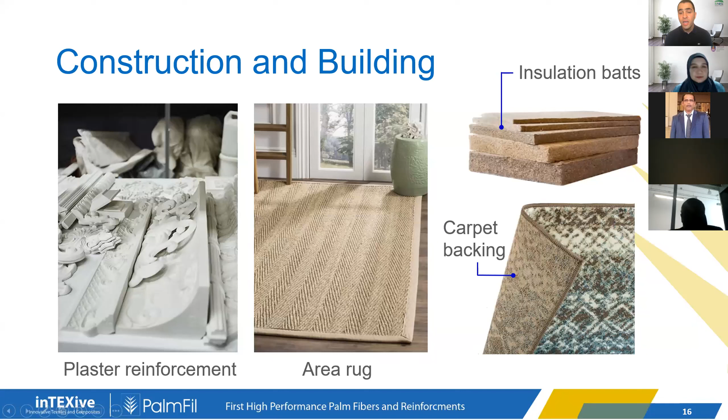Also, some of the well-established applications in construction and building, such as plaster reinforcement, also in making area rugs, also in using it as a carpet backing. This is a very big market that is dominated by jute fiber. Also, another interesting application is thermal and acoustical insulation batts, and this is also one of the emerging applications. Another application that is considered the traditional one is in packaging, in making burlap sacks and Hessian fabrics.

But also, on the other hand, there are other types of modern packaging, like in making biodegradable cutlery, like the ones that Professor Jawaid have shown us. And this, I think, is a very important application, especially with the wide ban of single-use plastic. And currently, we're seeing the single-use plastic directive of the European Union.

Another application is... okay, the screen is freezing. Okay, now it's working. Okay, so another application is with non-wood paper. This is also making paper from sources that didn't require cutting trees, and it's becoming one of the important topics in the paper making industry, whether in making decorative paper, tobacco paper, or banknote papers. And finally, some of the traditional applications like making ropes and twines, or even making sporting goods from natural fiber composites.

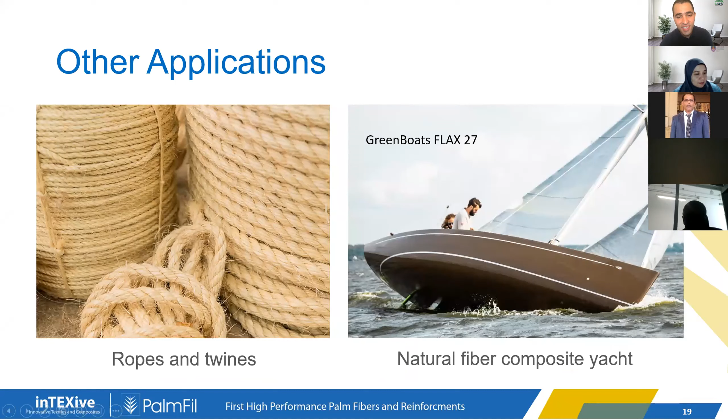Okay, so the question here is, how is it made? So actually, PalmFil fiber is based on a proprietary technology for extracting long, fine, pure, and flexible fibers from the byproducts of the date palm, such as the frond stalks and the fruit stalks.

But there were actually several challenges associated with extracting those fibers. And as you know, every part of the date palm, or all types of byproducts of date palm, can be used for extracting cellulosic fibers, whether these are the frond stalks, the leaflets, the fruit stalks, or the coir that surrounds the trunk, or even the trunk at the end of the palm life. But in order to be able to extract fibers from these byproducts, it's very important to have a very good understanding of the morphological anatomy of each fiber inside those sources.

So for instance, if we look at the morphology of the coir, you will find it has more like a honeycomb cross section. If we look at the frond stalks, we will find that it's made of fiber vascular bundles that contain large hollow lumens. If we look at the fibers from the fruit stalks, they are more like pure fiber bundles.

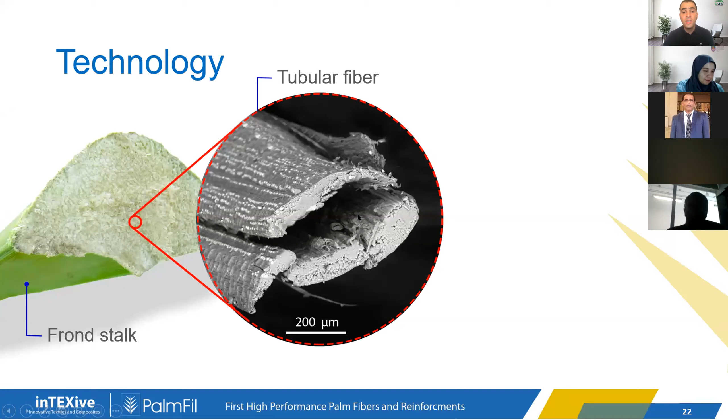So the purpose here was to eliminate this natural glue, and also to eliminate the void content, and split the tubular fiber into longitudinal segments, because this tubular structure provides very high rigidity to the fiber, so you cannot twist it or bend it, it will just break. So this is why we need to split the fiber into longitudinal segments, and afterwards continue to fibrillate those fibers into the elemental microfibrils, but most importantly, without causing any damage or breakage to those fibrils.

Actually, PalmFil technology contributes to the circular bioeconomy, following a closed loop cycle from cradle to cradle.

We have done comprehensive research on optimizing the extraction process, and also on characterizing the new fiber and benchmarking it against other high performance vegetable fibers, such as sisal, jute, flax, and hemp. And as I always like to say, it's not intended to compete with other natural fibers, but it's intended to complement the offering of the natural fibers.

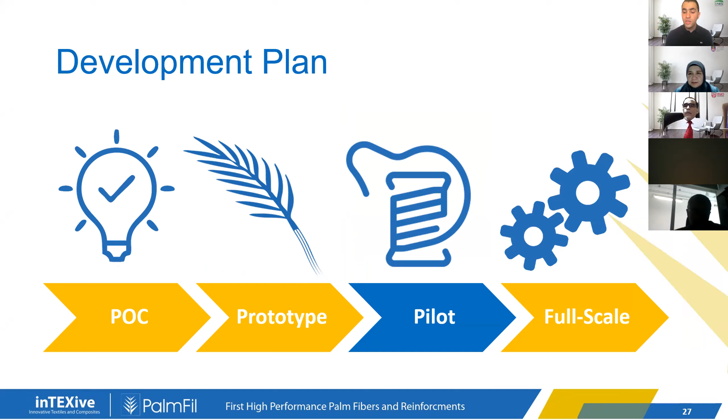So I will just quickly play a video from one of our semi-industrial trials. It was actually like a spinning trial that was performed on an industrial scale spinning line for flax.

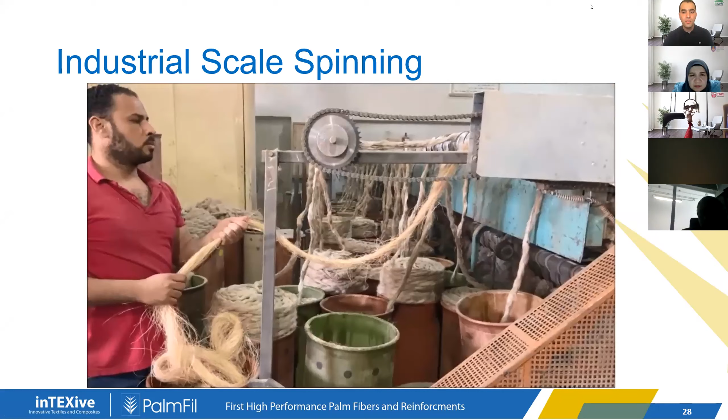So I hope the video played well. Sometimes it breaks due to the internet speed.